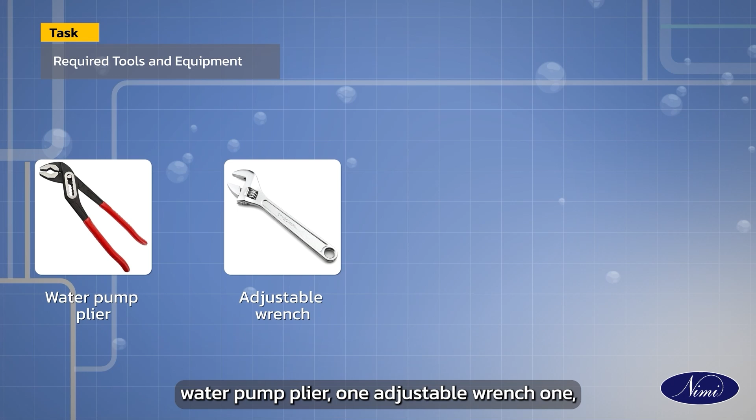Let us collect the tools and equipment required to do this: steel rule 1, steel tape 1, 4-fold box wooden rule 1, rawl jumper 1, water pump plier 1, adjustable wrench 1, pipe wrench 1, hacksaw frame and blade 1, ratchet die set 1, screwdrivers, washers as required, and spanners.

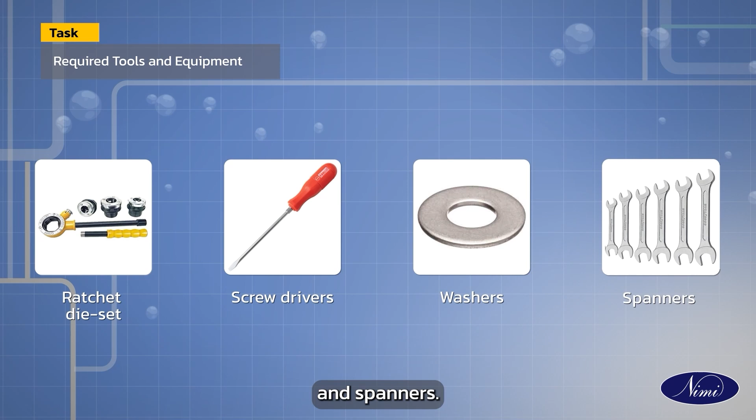How to use measuring tools. Steel rule: ensure that the steel rule is kept straight across the object to be measured. Place the steel rule on the workpiece and measure the given dimension. Mark the required length. Do not use the steel rule as a scraper, screwdriver or pry bar.

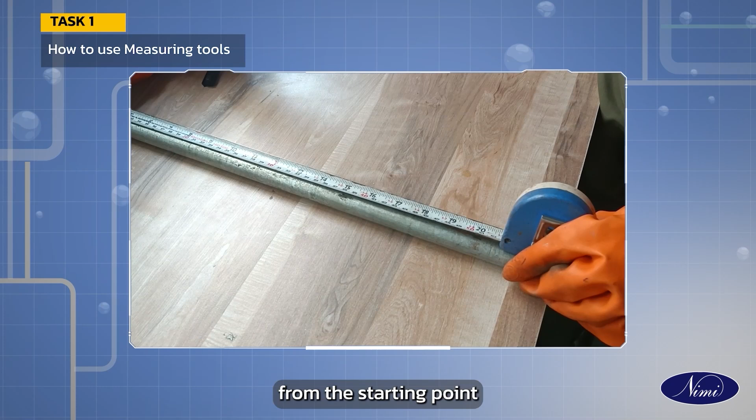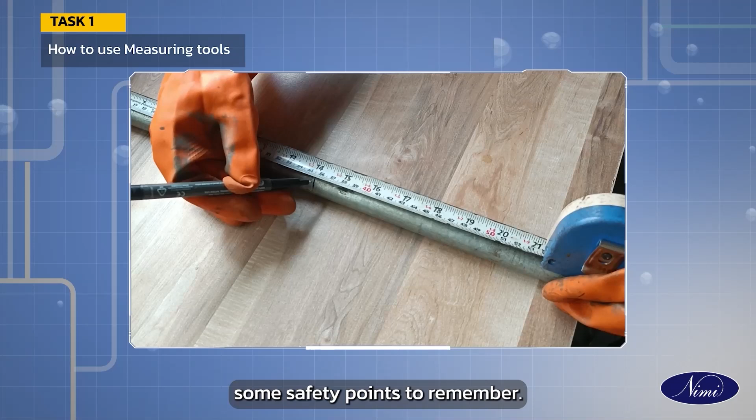Steel tape: gently pull the tape from its case, guiding it from the starting point to the desired length. Measure according to the given dimensions. Mark the measured portion. Some safety points to remember: wipe down the tape after each use with a clean, lint-free cloth. Be cautious when working around electrical appliances. Retract the tape slowly.

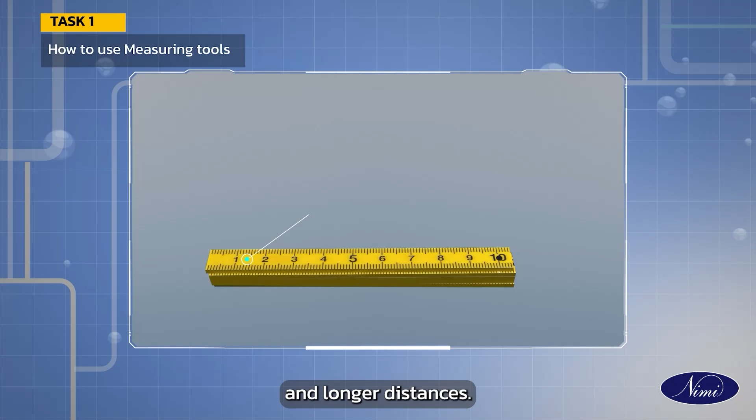The folding rule is handy for measuring both shorter and longer distances. If you need to measure something small, just unfold one section of the ruler. Place the 4-fold box wooden rule to measure the given dimension on the workpiece. Mark the measured portion. Folding rules work well when you need to measure something that is high or further away.

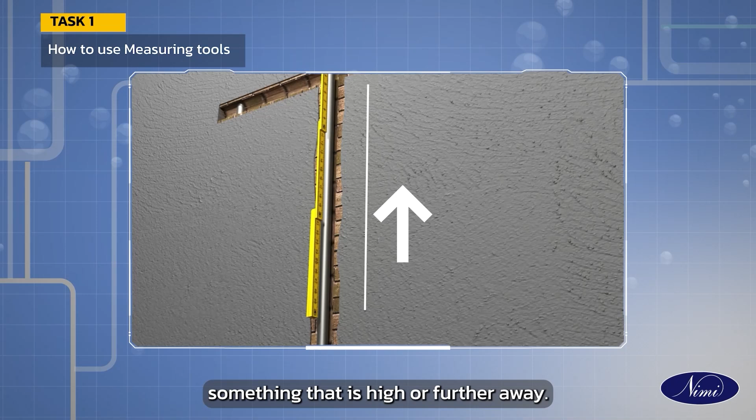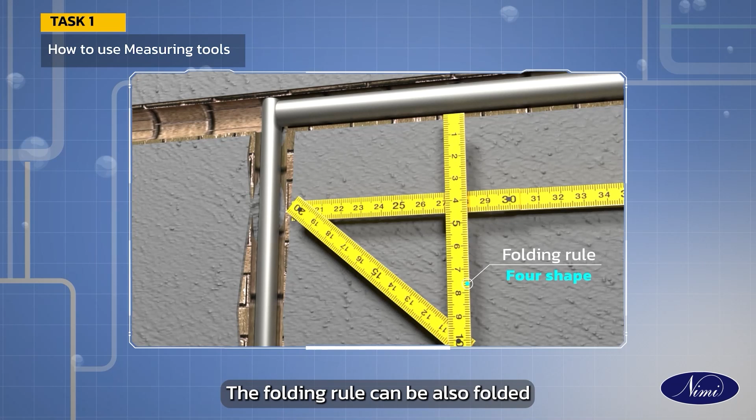You can bend the ruler into a triangle or at some other angle and use it to approximate the angle on a house or a bridge. The folding rule can also be folded into a 4 shape to assist with drawing parallel lines. Be cautious of the ruler's sharp edges. Handle it carefully to avoid cuts.

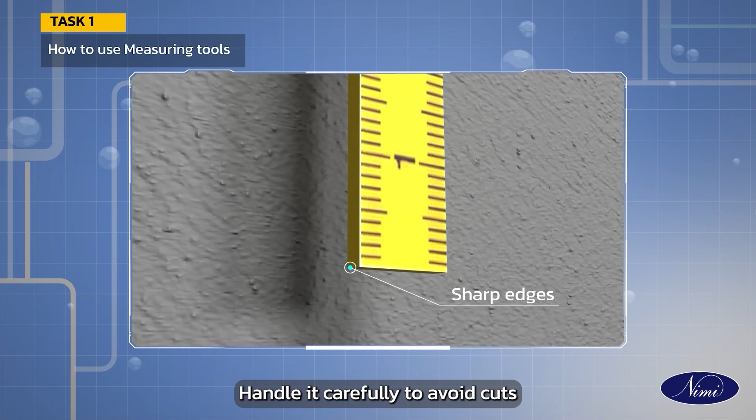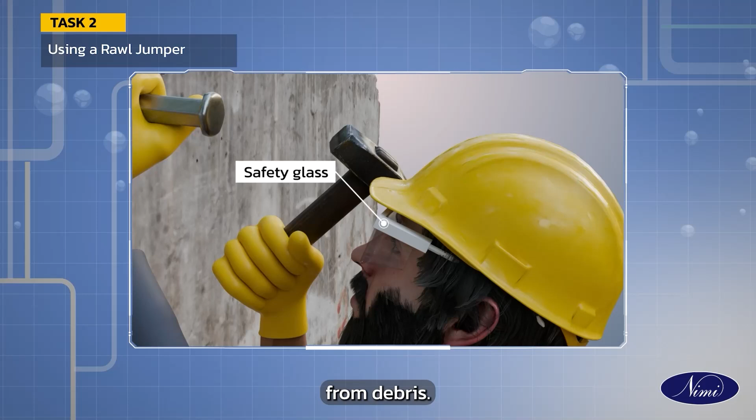Some safety points to remember: always wear safety glasses or goggles to protect your eyes from debris. Use gloves to prevent cuts and abrasions while handling the tool.

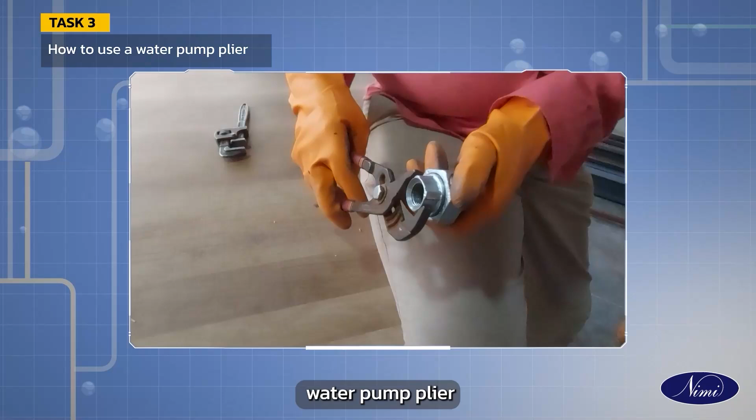How to use a water pump plier. Hold the workpiece with jaws. Use a firm grip on the water pump pliers with the smooth jaws against the object for tightening and the teeth against the object for loosening. Work with round objects like spindles.

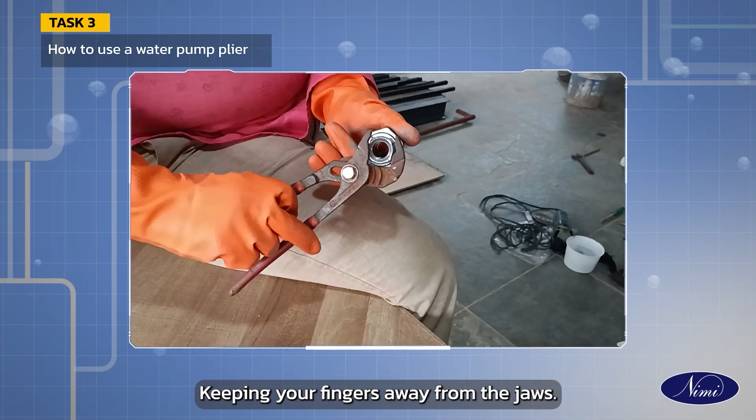Some safety points to remember: hold the pliers using a firm grip, keeping your fingers away from the jaws. Avoid placing your hand directly in the path of the jaws to prevent pinching.

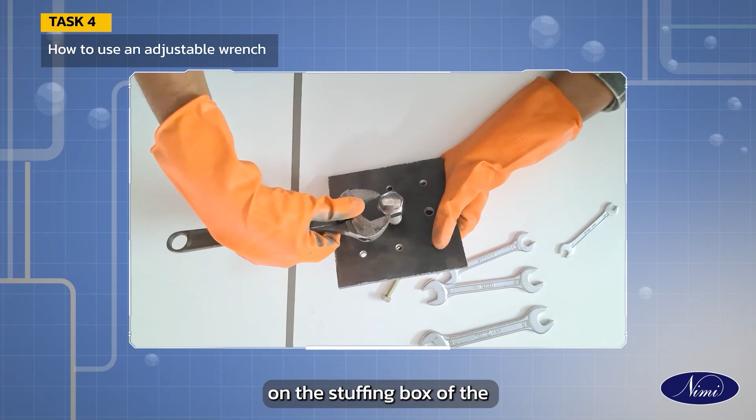How to use an adjustable wrench. Place the adjustable wrench on the stuffing box of the bibcock. Grip and work to tighten or loosen the nut. Use it to dismantle the hand pump parts. Use it to assemble flange bolt and nuts on the suction pipe.

Some safety points to remember: never strike the wrench with a hammer or another tool. Striking it can break the wrench and cause injury.

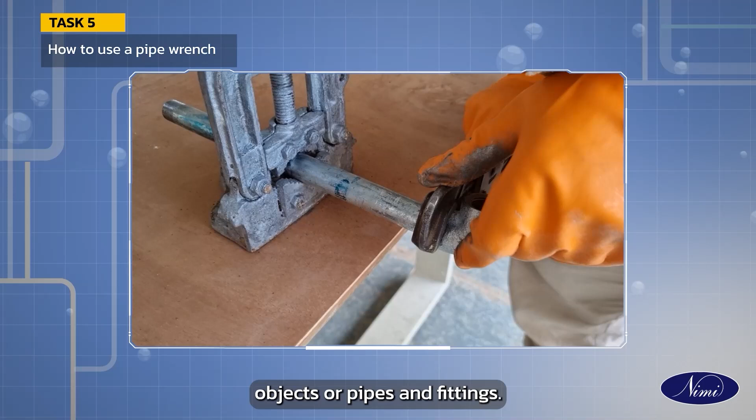How to use a pipe wrench. Place the pipe wrench on round objects or pipes and fittings. Grip well and work to dismantle or assemble the pipe with fittings. Use the correct size pipe wrench according to the size of the pipe or fittings. Protect your eyes by wearing safety glasses or goggles.

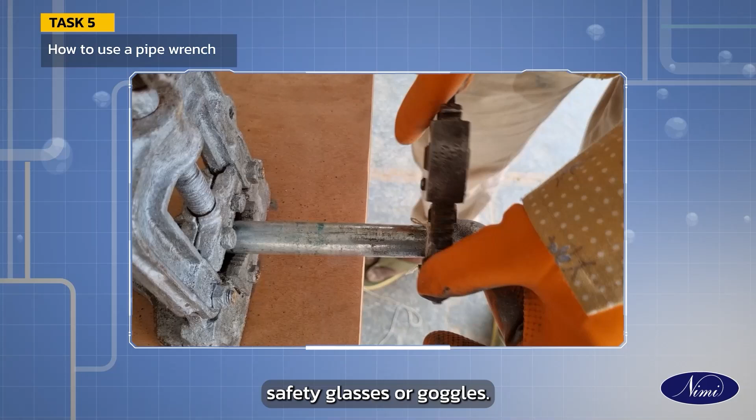Pipe wrenches can cause eye injuries if they slip and strike the eye.

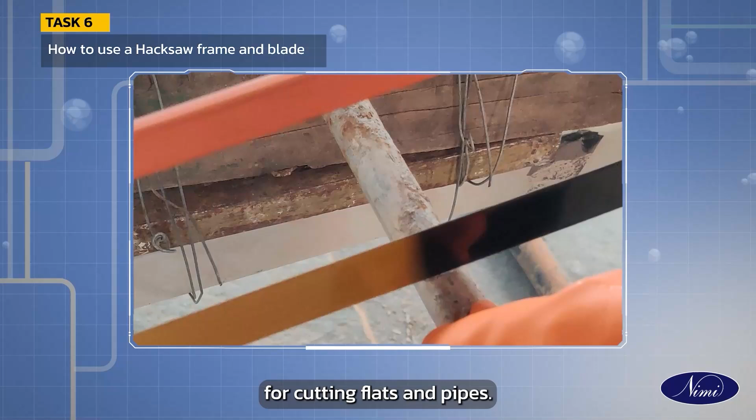How to use a hacksaw frame and blade. Use a hacksaw for cutting flats and pipes. Use a fixed hacksaw for a fixed length and an adjustable hacksaw for different lengths. Use deep cutting for cutting bigger diameter pipes and tubes.

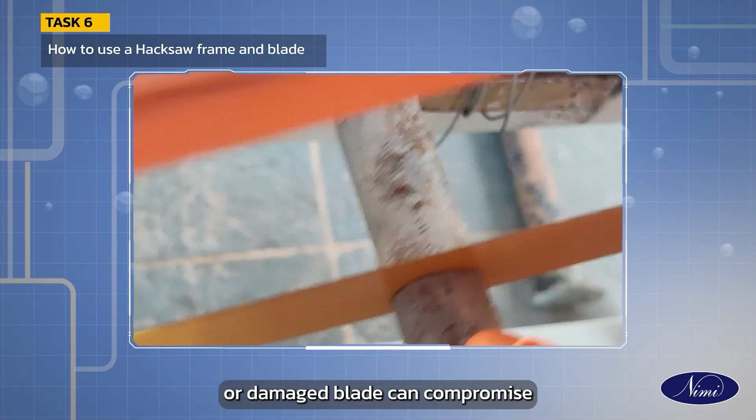Select the correct pitch blades according to the cutting workpiece. Before using, check the blade for any signs of damage or wear. A damaged blade can compromise safety and efficiency. If the blade is worn out, replace it with a new one.

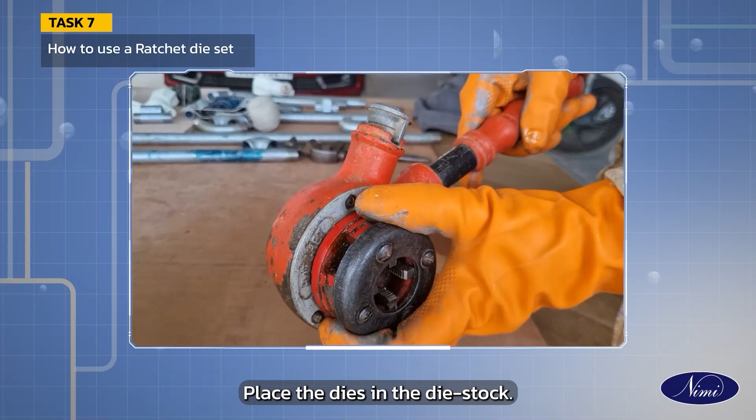How to use a ratchet die set. Select the die according to the size of the pipe. Place the dies in the die stock. Place the die set on the pipe end and hold firmly in the pipe vise. Rotate in clockwise direction to cut external threads on the pipe end.

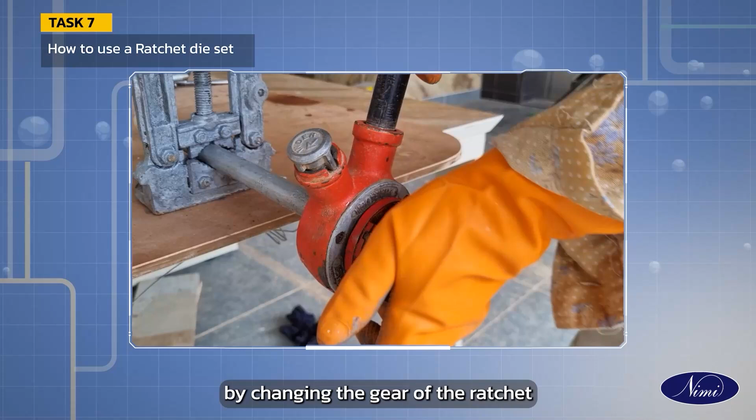Reverse the action by changing the gear of the ratchet die stock. Check the threads using female threaded fittings. Use lubricant oil frequently while cutting threads.

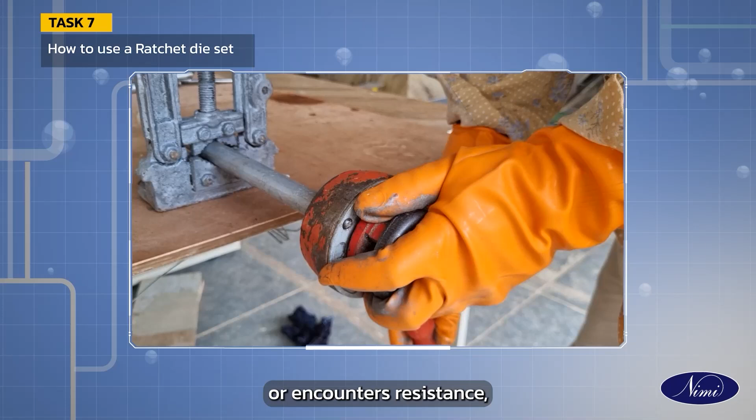Some safety points to remember. If the die gets stuck or encounters resistance, reverse the ratchet slightly to release it. Forcing it can damage the threads or the tool. Protect your eyes with safety glasses or goggles, as metal shavings or debris can fly during threading.

How to use screwdrivers. Use the appropriate screwdriver bit to drive screws into the brick wall. Use a ratchet for quick and easy screwing operation. Use a reversible screwdriver that has a star head and a flathead screw.

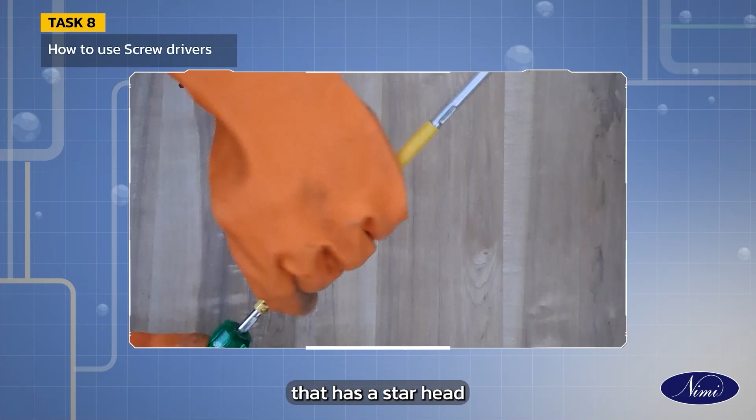Never hammer the screwdriver handle as it can damage the handle and affect its usability. For electric work, use a screwdriver with an insulated handle to safeguard from an electric shock.

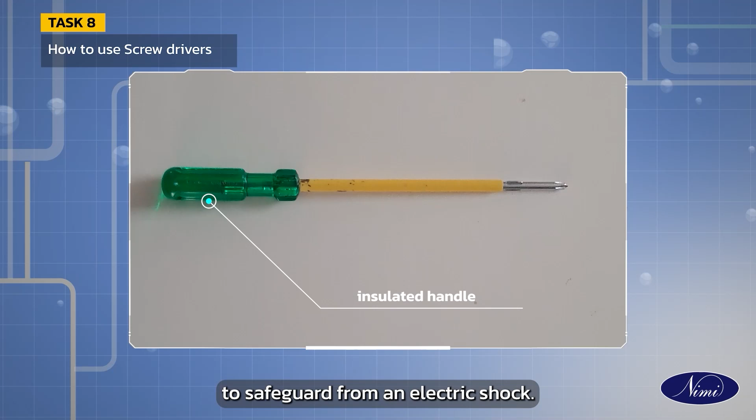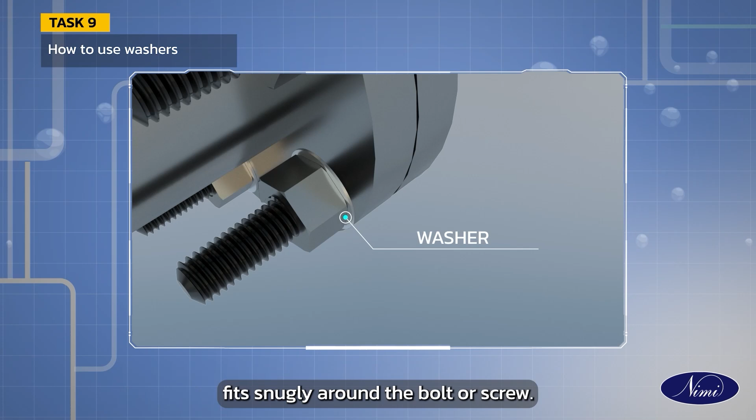How to use washers. Place the washers in between the bolt and nut for tightening the flanges, and for various locking operations of two metal objects. Ensure that the washer fits snugly around the bolt or screw. The inner diameter should be slightly larger than the fixing diameter. If it is too big or too small, it can affect its effectiveness.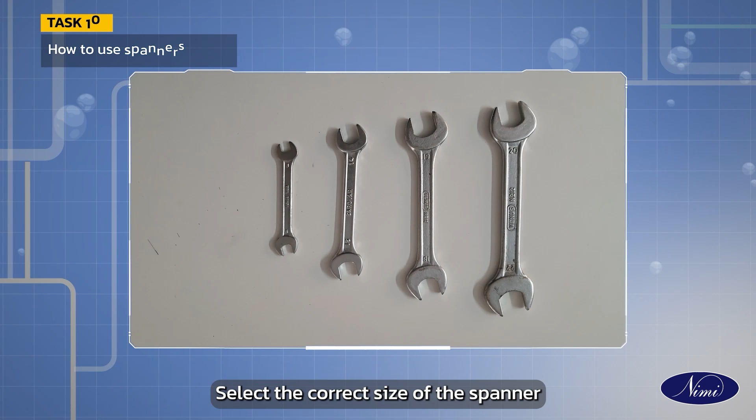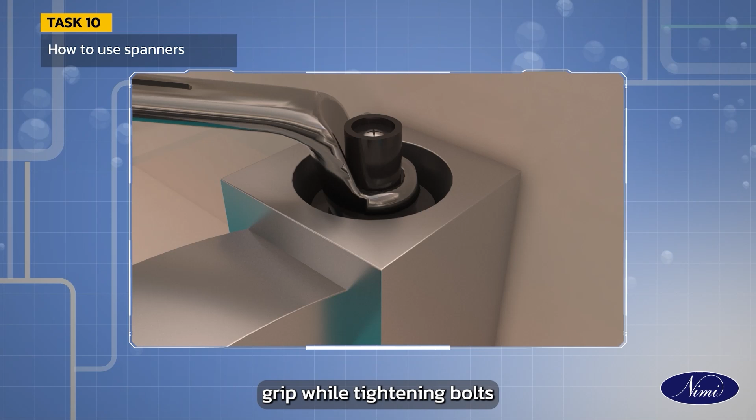How to use spanners. Select the correct size of the spanner for locking nuts. Use a single end for a specific purpose. Use a double end spanner to tighten two different sizes of nuts. Use a ring end for firm grip while tightening bolts and nuts where there is obstruction and a long handle is needed.

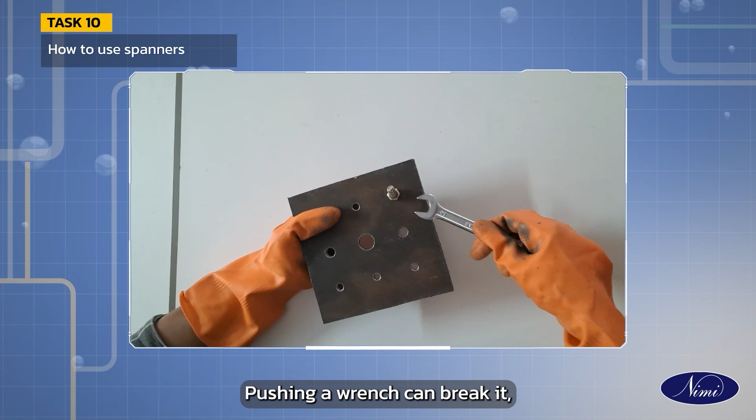Avoid pushing a spanner. They are designed for creating torque, not pushing. Pushing a wrench can break it, so always turn it instead of pushing.

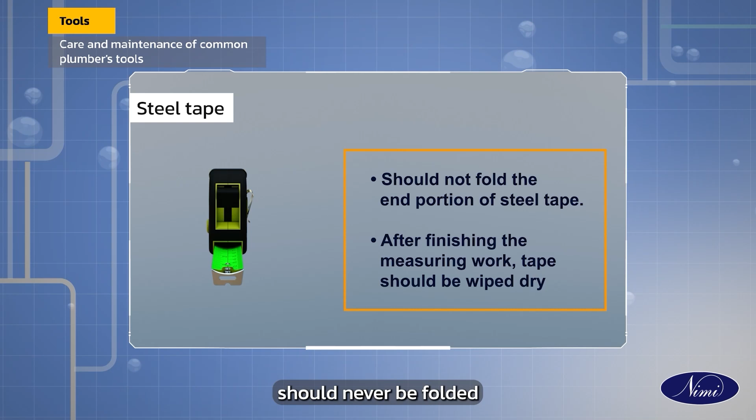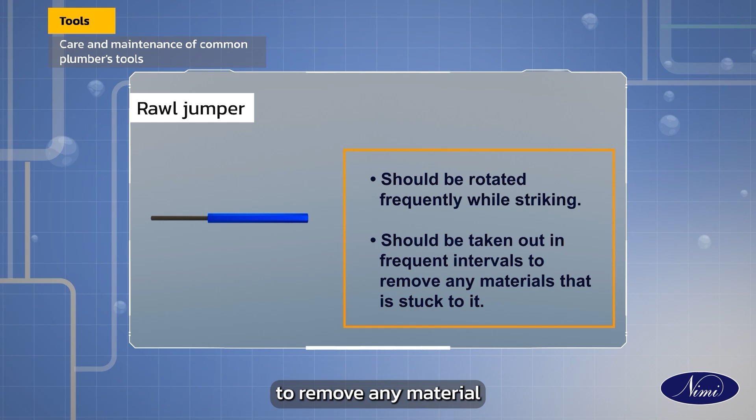Care and maintenance methods for the common plumber's hand tools. Steel tape: the end should never be folded or bent, and after use it should be wiped dry. Rawl jumper: it should be rotated frequently while striking, and taken out at frequent intervals to remove any material stuck to it. Hacksaw frame with blade: after each use, clean thoroughly to remove any debris.

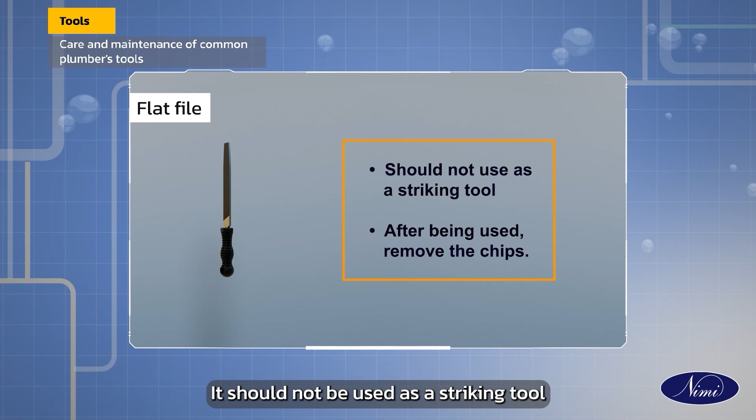Flat file: it should not be used as a striking tool, and after use the chips should be removed. Chisel cold flat: do not use a mushroom-headed chisel. While using chisels horizontally, do not strike with a hammer.

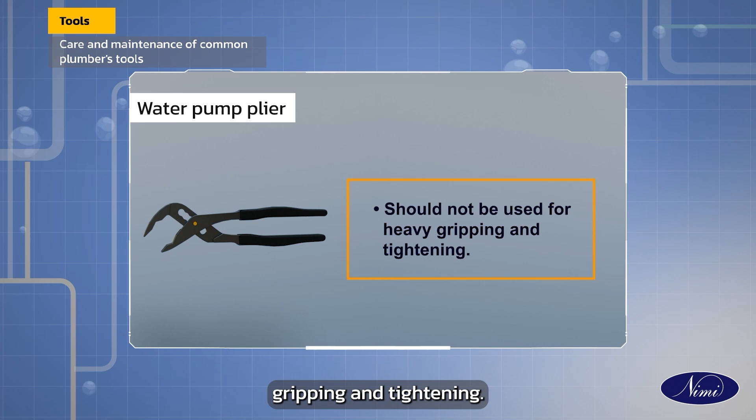Screwdriver: it should be used to fix the tip correctly to the head of the screw, and should not be used as a chisel. Water pump plier: it should not be used for heavy gripping and tightening. Adjustable wrench: do not strike the handle portion with a hammer while handling heavy work. Pipe wrench: do not use as a hammer.

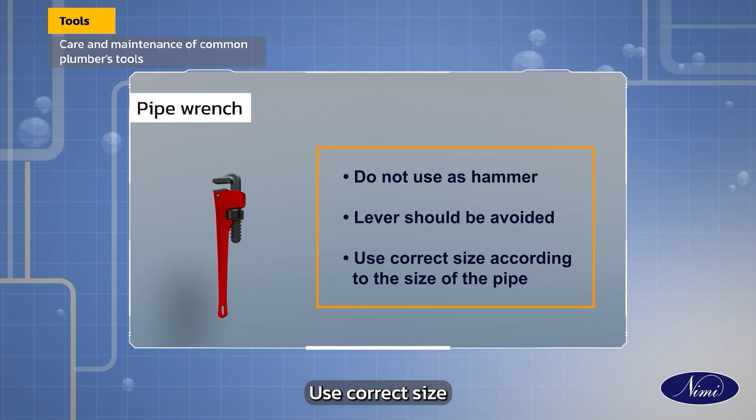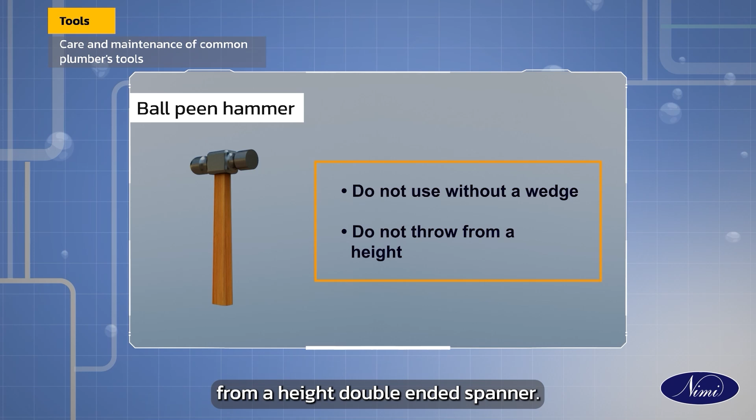Lever should be avoided; use the correct size according to the size of the pipe. Spirit level: do not throw after using. Ball peen hammer: do not use without a wedge, and do not throw from a height. Double-ended spanner: do not use for striking and do not use with a lever.

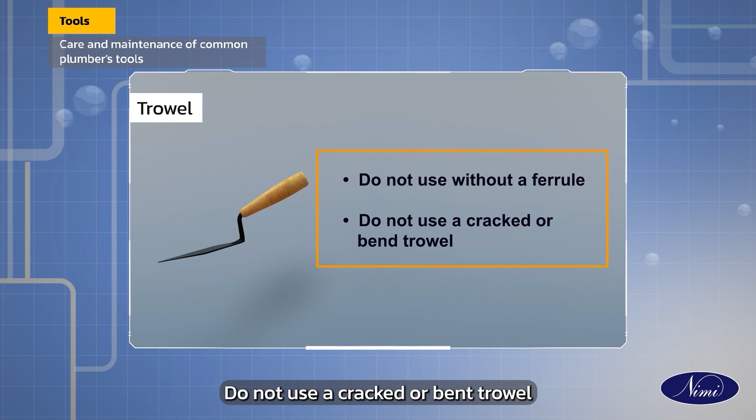Trowel: do not use without a ferrule, and do not use a cracked or bent trowel. Die stock with dies: do not give more depth to cut quickly, and use lubrication oil frequently. Pipe vice: do not over-tighten the handle, and do not use a lever to over-tighten the handle.

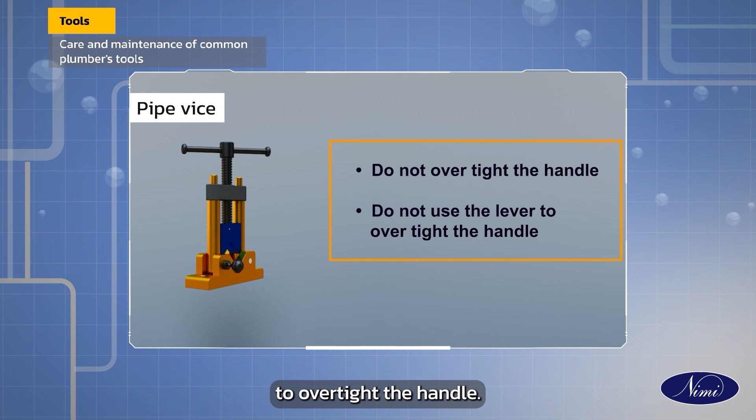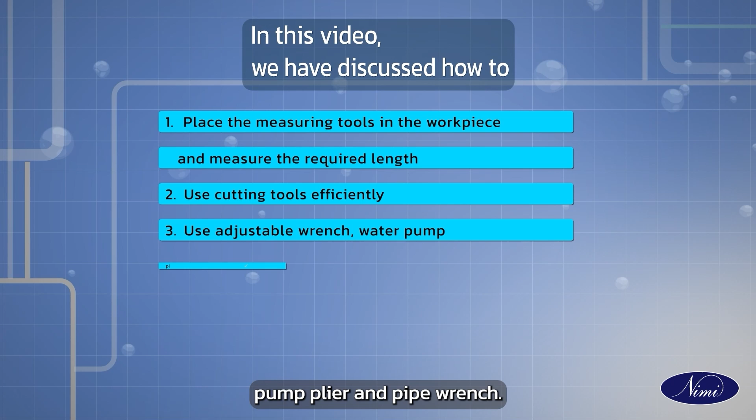In this video, we have discussed placing the measuring tools on the workpiece and measuring the required length, using cutting tools efficiently, using an adjustable wrench, water pump plier and pipe wrench, using a ratchet die set for cutting external threads of pipes, using a screwdriver, washer and spanner, understanding the importance of plumber hand tools and their application, and understanding how to maintain plumber hand tools.